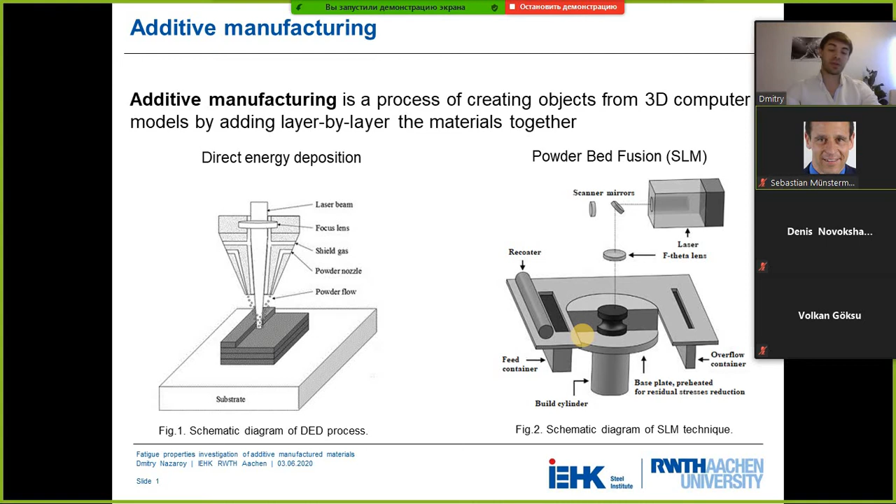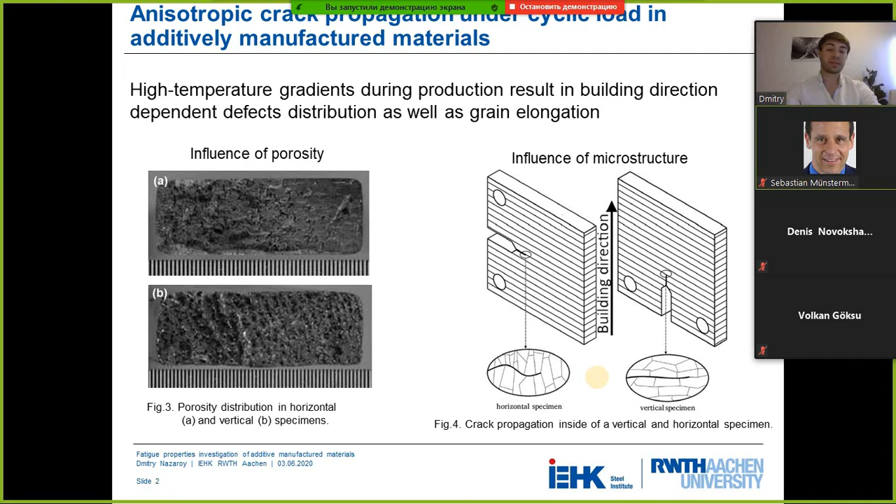This feature of production technology has its own influence on the microstructure, on the defects distribution, etc. You can see the dependence on the building orientation, and how the porosity level is differentiated with regards to the building direction in vertical and horizontal specimens. It should also be noted that the microstructure of additive manufactured steels consists of columnar elongated grains, because the grains grow in the direction of heat transfer. With regards to the applied notches, the crack could propagate along the columnar grains or transverse, taking shorter or longer routes, and it has an influence on the rate of crack propagation.

I will also give some information about fatigue propagation theory. The crack propagation is comprised of the incubation period, which in my case was the time from load application until the crack reached the length of 1 millimeter. The incubation period also comprises crack initiation. Normally the crack initiates from the surface, at inclusions or from cracks, but slip bands could also serve as an initiation point.

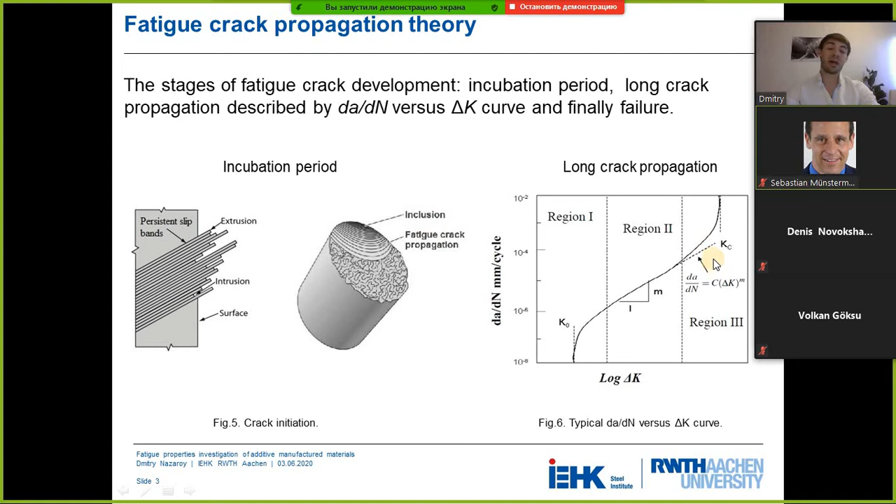That is followed by long crack propagation, and the typical curve of crack propagation is presented in figure 6. It's comprised of 3 regions: region number 1, the threshold region; region number 2, the Paris law region; and region number 3, the unstable region. In this work, as is normal for lab investigations, I tackled a problem, and the problem is the lack of material. So in this circumstance, I had to analyze and choose the most appropriate method of testing fatigue properties. The most popular is the tension compression test, and I analyzed it.

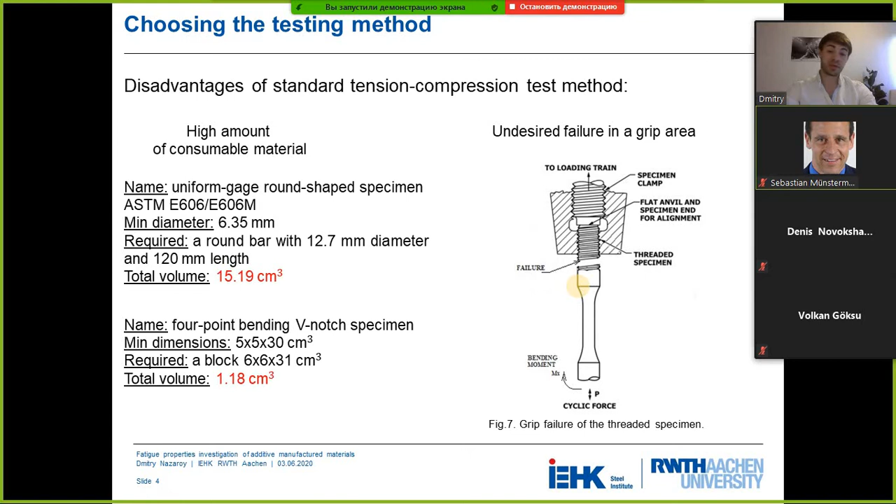In order to produce a tension compression specimen with the smallest diameter, around 15 cubic centimeters of material is required, which is much more in comparison to the proposed small specimens. Another problem is the undesired failure in the grip area. For example, when the tension compression specimen with threaded edges is not properly aligned with the main axis, it can cause additional bending moments, and finally the failure could appear in the thread area. It's undesirable because we lose the priceless material, so this method is unacceptable.

Therefore, the bending method is the priority, and the most popular bending method is the 3-point bending method, but in this case only the material under the maximum force is brought to the maximum load, and any shift to the right or to the left will have a negative influence on the results of the experiment.

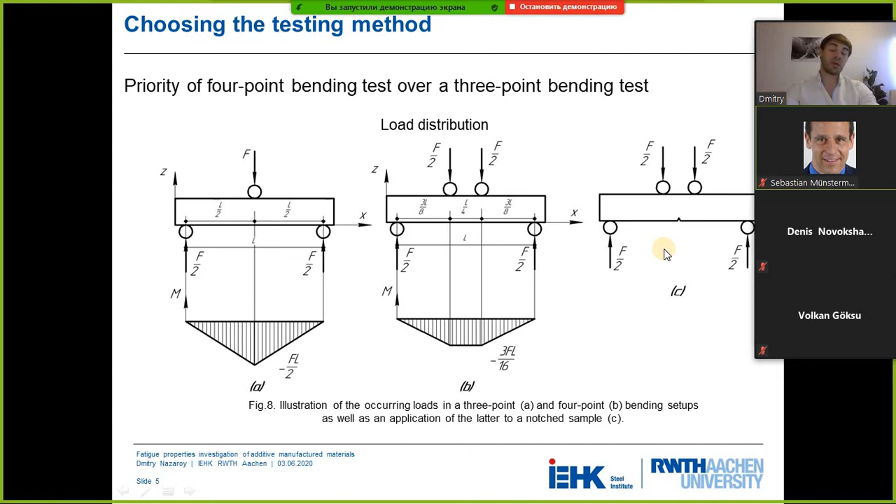Therefore, it was chosen to take the 4-point bending method because the broader amount of material is brought to the maximum force. It's more convenient. But it should also be noted that a decision was taken to create an artificial notch because it's meaningful. Without this notch, it was uncertain when and where the crack would appear.

But before creating the notch, the microstructure of the given plates should be taken into consideration. In this experiment, we received 6 plates. Plates number 2 and 6 were printed flat on the surface, and therefore the notch was produced in such a way that the crack propagated perpendicular to the building direction.

Plates 4 and 5 were printed perpendicular to the flat surface, and these specimens are called vertical specimens. Here the notch was produced in such a way that the crack propagated coaxially to the building direction. With regards to plates number 1 and 3, the crack was tilted 45 degrees to the building direction.

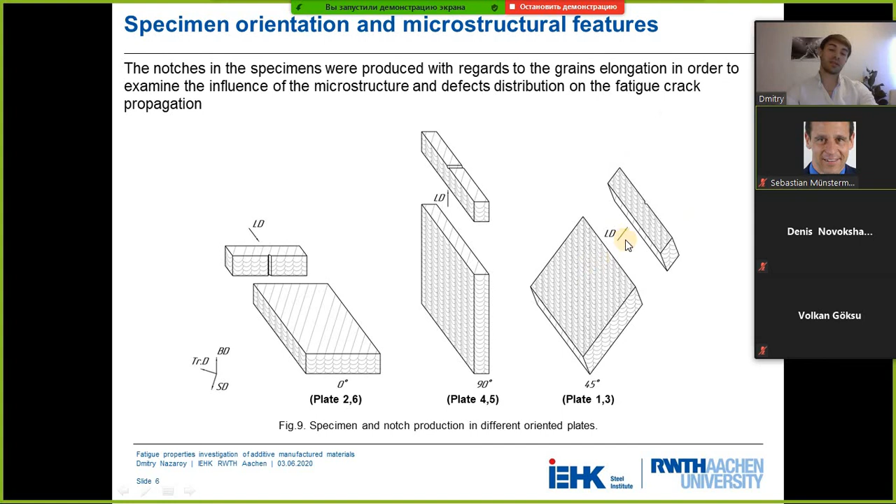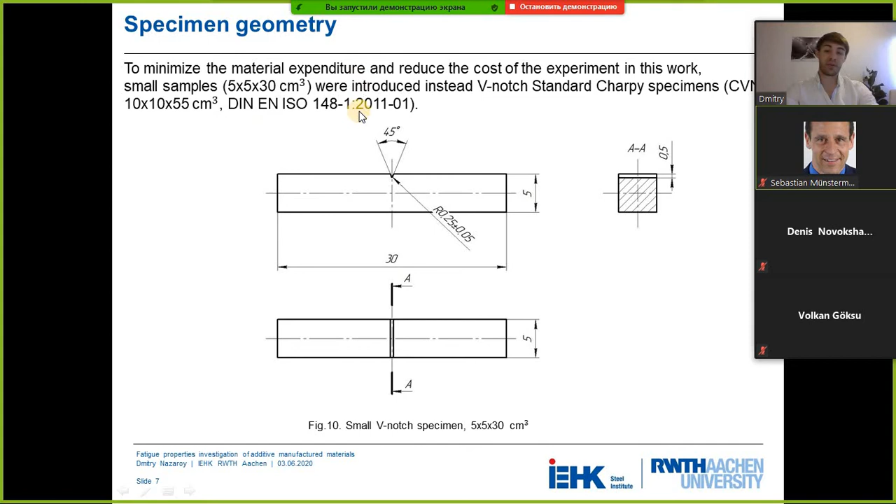So the specimen geometry was chosen like this: 5 by 5 by 30 cubic centimeters. Because the notch was a critical factor, since the notch geometry influenced the incubation period, it was necessary to create equal conditions for all of the specimens. In order to do that, the notch cutting device was assembled based on a diamond cutting wheel.

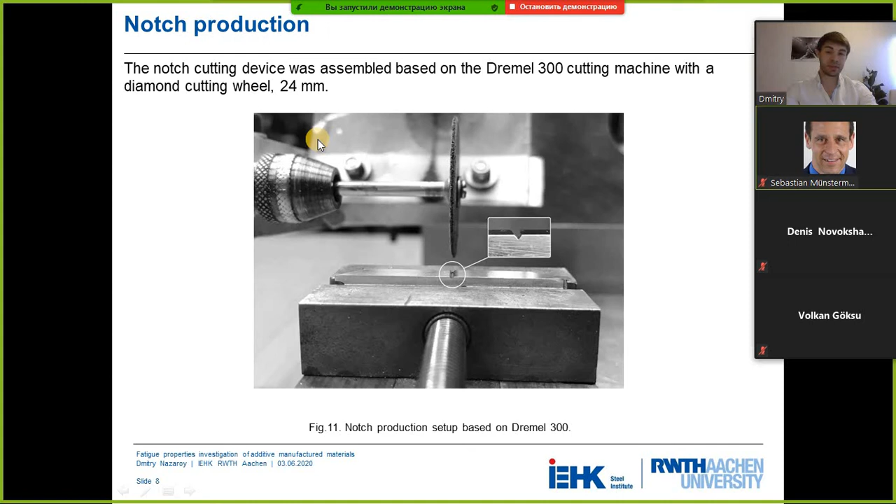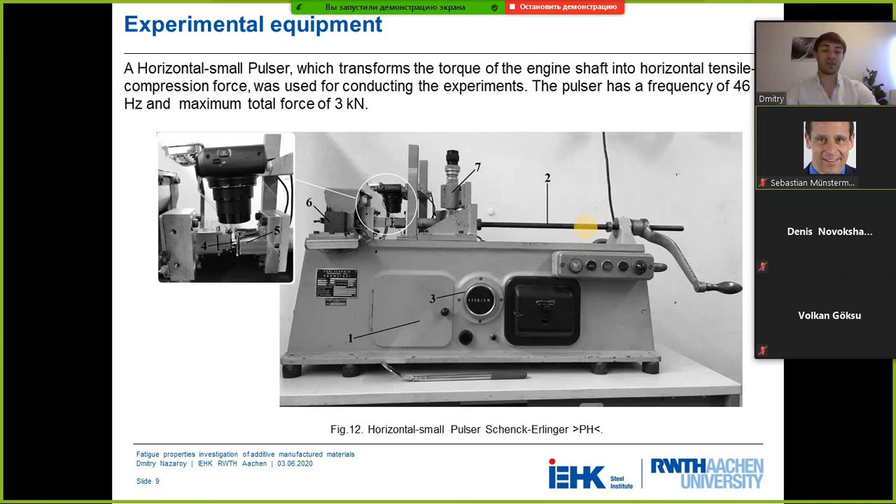When the equipment was chosen, the method was chosen. The method was supposed to be verified, and first it was tested on a high strength structural S690 steel, whose fatigue properties are well investigated. For that, the forces listed to the left were applied at stress ratio 0.5. That triggered the crack to propagate as demonstrated in figure 13. So the crack propagated in the direction of the core of the specimen.

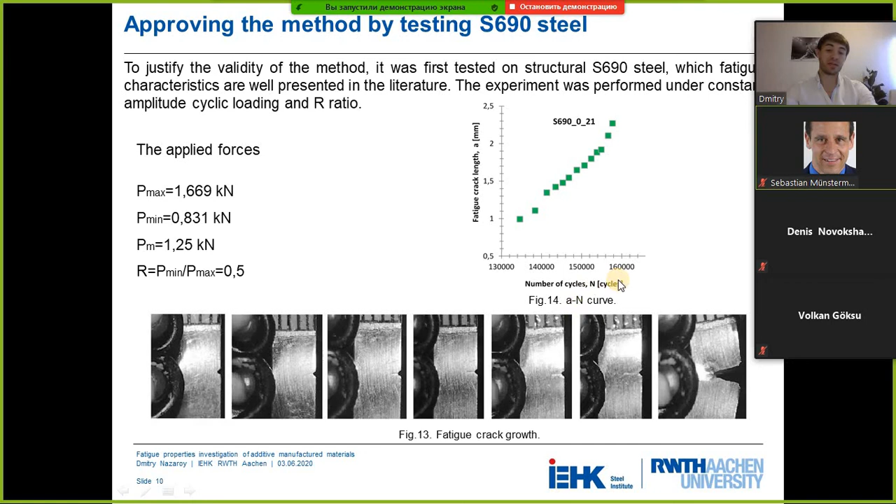The length was recorded with regards to the number of cycles, and it turned into the a-N curve, which is presented in figure 14. By taking the slope of this curve, da/dN data was received, and the stress intensity factor range was calculated according to this formula. Finally, we received the crack propagation curve for steel S690.

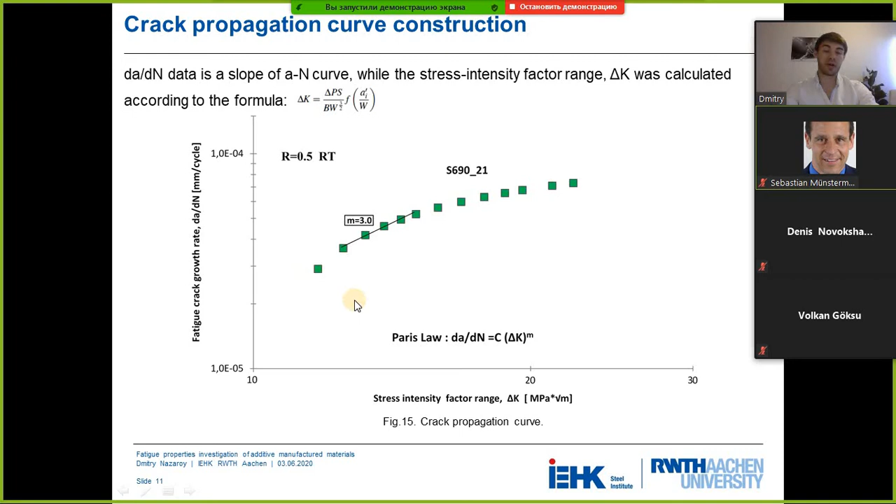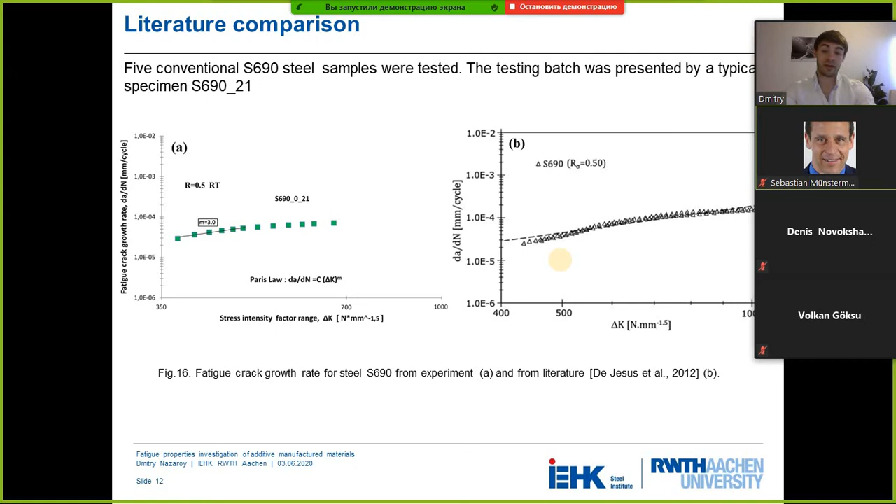These results were compared with the results in the literature, and the curves showed a similar trend. So the method was approved, verified, and ready for testing the fatigue properties of additive manufactured materials. It should be said that every single direction was represented by at least 6 specimens, and only one typical specimen was chosen, which represented the whole batch.

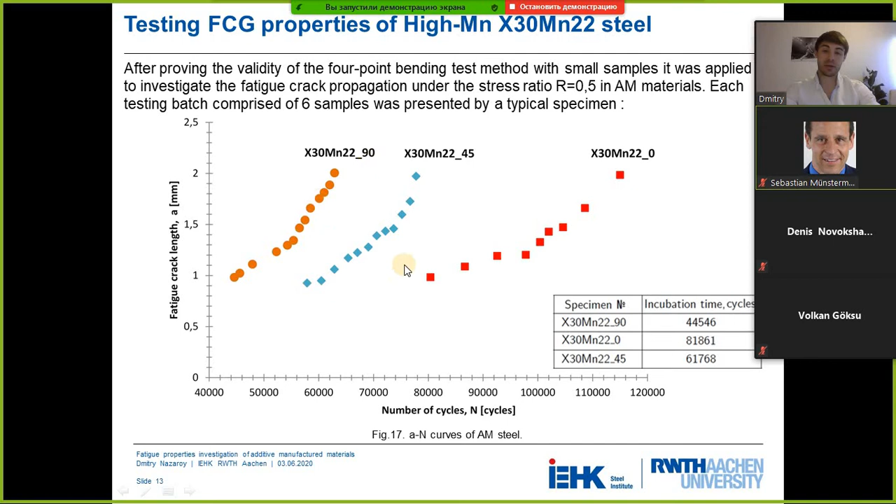Here we can see a-N curves from the specimens produced with different building orientations, and it's obvious that the incubation time was shorter for vertical specimens and longer for horizontal specimens. By applying the data reduction technique, the crack propagation curves were constructed, and the scatter in the crack propagation curves is obvious, with slower crack propagation for horizontal specimens and the fastest for vertical specimens. Tilted specimens showed results close to the vertical specimens, even though the crack propagated in an intermediate fashion.

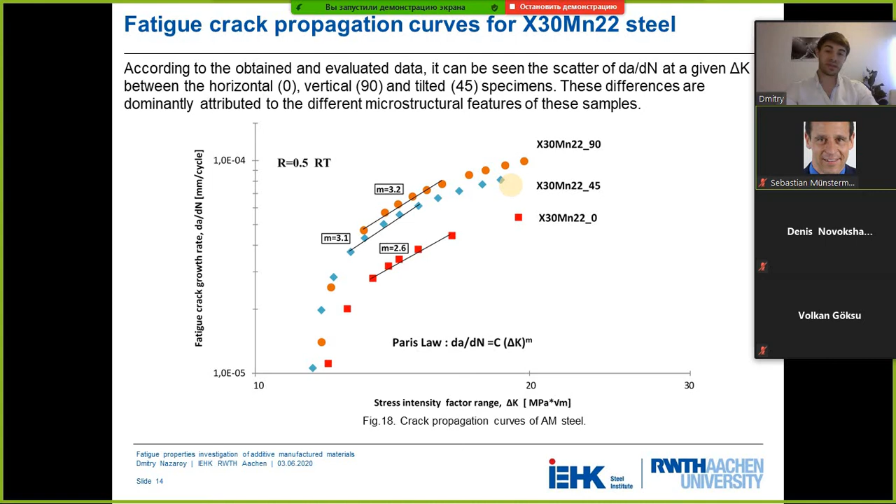And since the crack propagated coaxially with the elongated columnar grains, the crack cleaved down the length of the columnar grains, similar to chopping wood with an axe. And therefore the longitudinal distribution of the fracture surface was formed.

Since the crack propagated coaxially, alongside the columnar grains, as I said, it propagated through the shorter routes, and that resulted in a faster crack propagation.

With regards to the porosity level, these specimens experienced shorter time interval, lower temperature gradient, and therefore slower cooling rate. Therefore, the material was a little bit overheated, and that resulted in a bigger diameter of the porosity. That triggered an additional crack propagation mechanism as jump over cavities. So that facilitated the fast crack propagation.

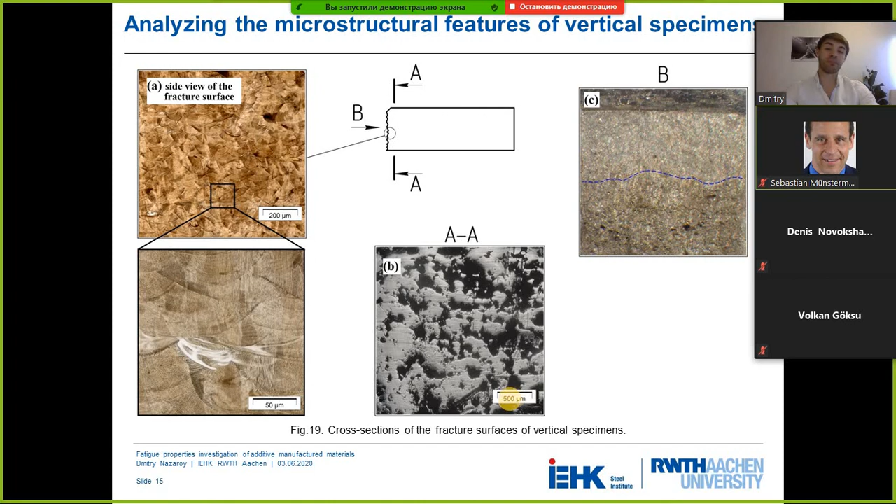With regards to the microstructure, these specimens experienced longer time interval, higher temperature gradient, and therefore high cooling rates. That resulted in a smaller diameter of the porosity, which was distributed perpendicular to the columnar grains. So all of these features resulted in the slowest crack propagation.

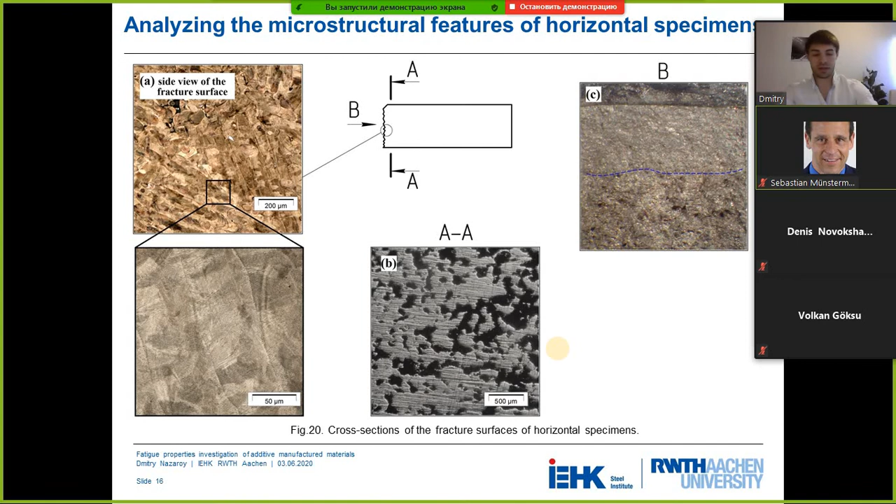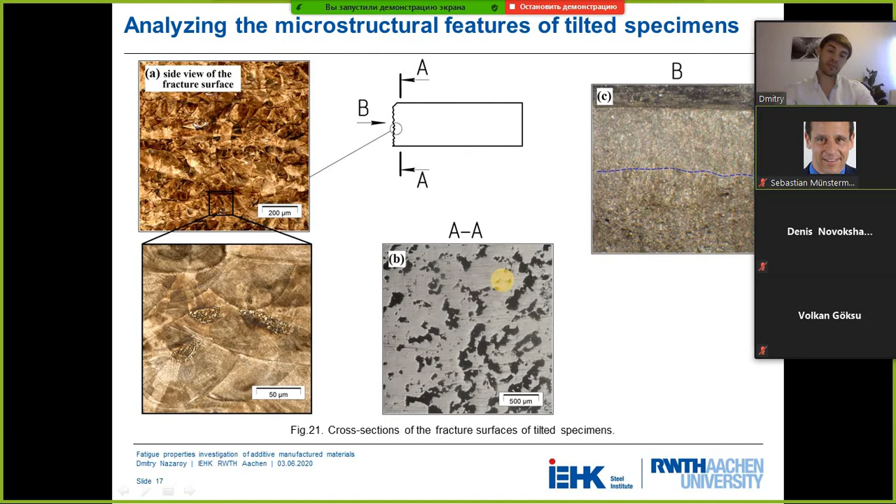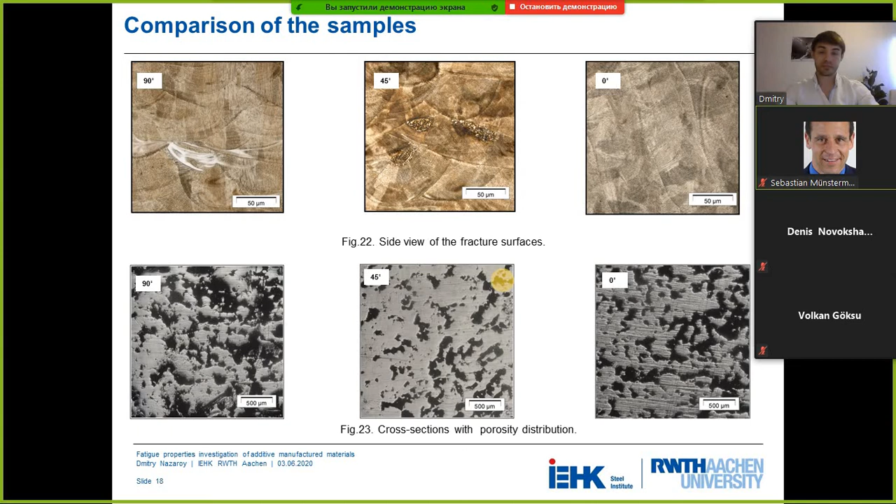And now I would like to come to the conclusion and say that in this work, a new 4-point bending test method was introduced. It was tested, verified, approved, and used to investigate the fatigue properties of high manganese X30Mn22 steel samples produced with different building orientations. The anisotropy was determined, with the fastest crack propagation rate for the vertical specimens. The source of anisotropy was determined as microstructure and porosity level. So the highest fatigue crack growth rate was in the longitudinal direction of the columnar grains.

But for better understanding the whole picture of the fatigue properties of the steel, it is meaningful to carry out further investigations and probably to consider other factors such as residual stresses, roughness, and micro cracks, to better understand the properties.